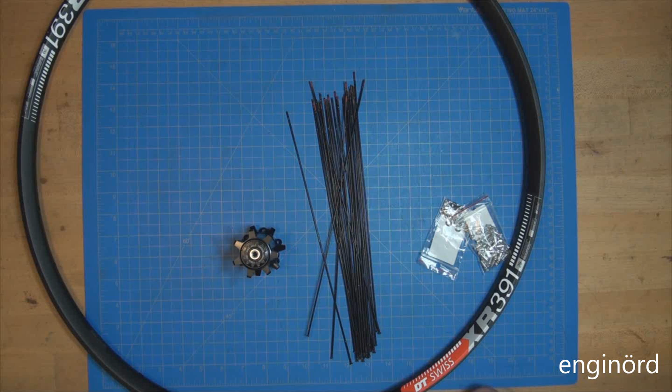As you might guess from the cover picture, we got a new project on hand, and in this episode we're going to be lacing a wheel. This is a special wheel. I have a special place in my heart for Cannondale Lefty, and this is the Lefty hub.

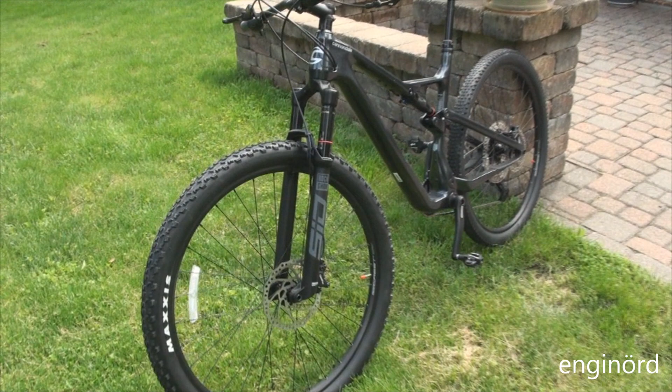I was trying to get the new Cannondale Scalpel bike, and for 6 months of research through Pinkbike and Craigslist, eBay, Marketplace, I couldn't find one that would fit my needs. So I decided to buy a stock bike and then equip it with the Lefty fork. So here's a picture of the stock bike. As you can see, it's got the double crown fork, which is the traditional fork.

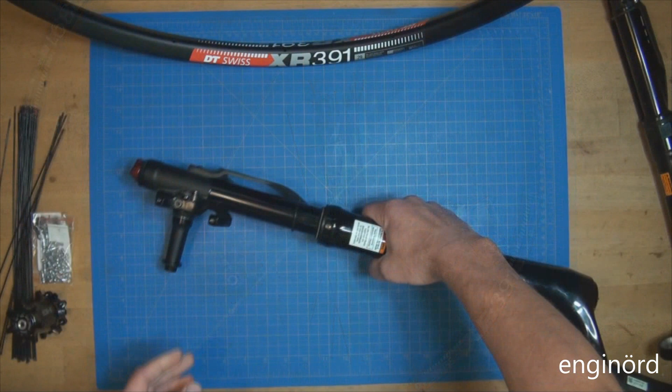I'm a Cannondale connoisseur, and as such, I always liked the Lefty forks. I found this fork together with the hub and the spokes. So this gentleman sold me this as a set. So all I had to do is figure out what kind of rim I want to lace it into. And first I chose a carbon rim, but they are pretty pricey. So long story short, I ended up settling on a DT Swiss XR 391.

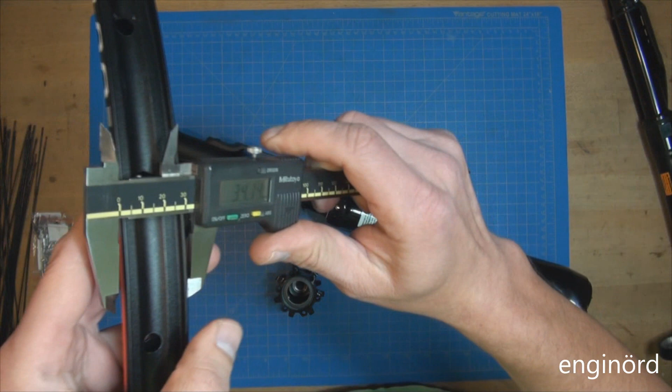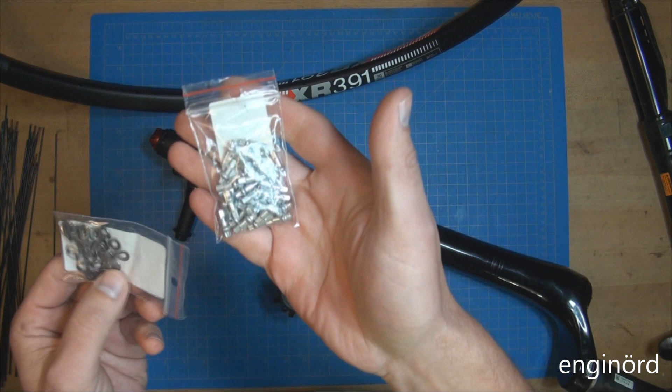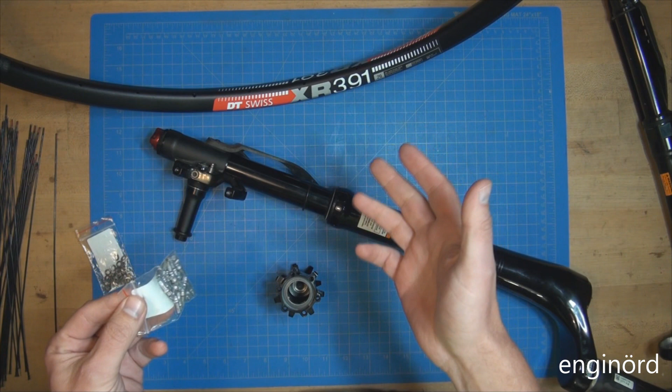This rim measures 29 millimeters on the outside and 25 millimeters on the inside. This is a little wider than what I typically use on a cross-country bike, but this is just a new style that everybody uses. The DT Swiss rim came with the nipples and the steel washers. So these are special washers that you need to include with the spokes. Obviously everything is gonna increase the weight of the rim, but this is just something I'll have to live with for the time being. These are aluminum nipples. The head uses E5 Torx.

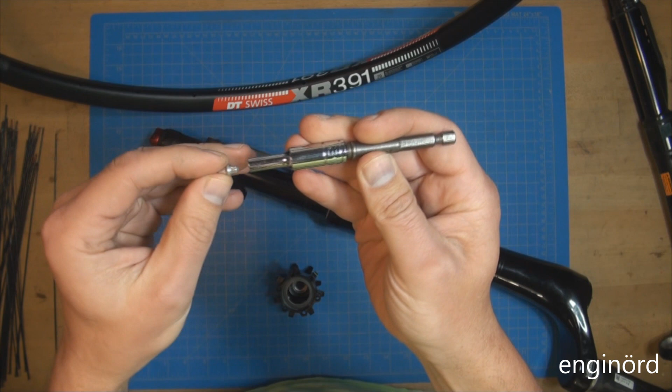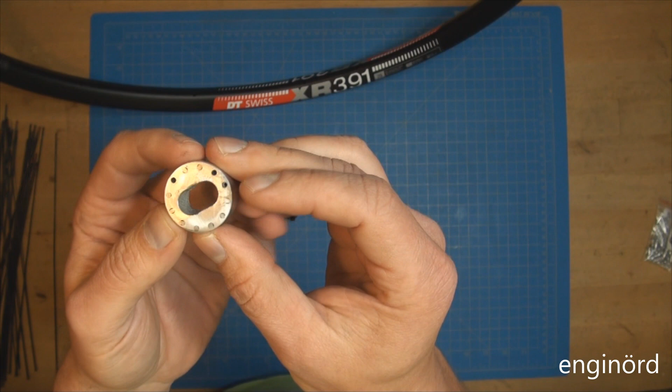The first problem with the Lefty is to remove this cap. So I need to remove this cap in order to mount this in a truing stand. I have a traditional truing stand which has two standoffs, and so you can see that from this side the Lefty is closed shut. A couple of years ago I made this tool. It's a simple tool. I just drilled these holes and I populated these spokes. I just cut pieces of spokes that would engage this nut, and it worked kinda okay. But what happened is when I used it, it had a tendency to hurt these openings and smash them.

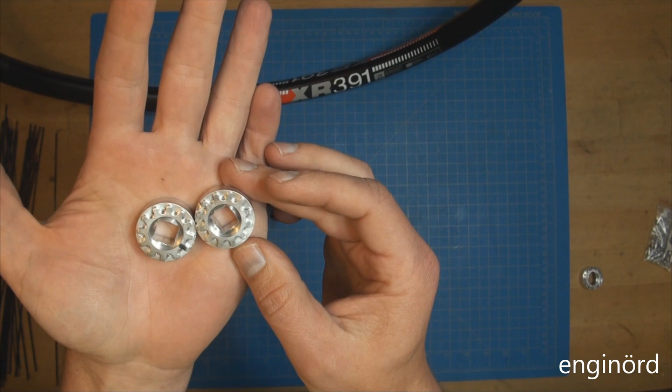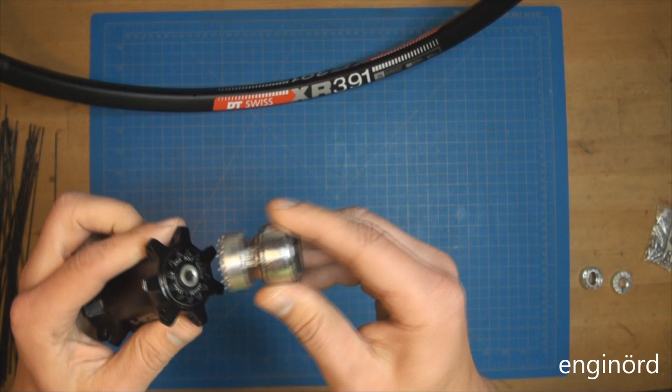Since I have a CNC machine, I designed a new tool, went ahead and cut these two pieces. They're designed to engage with a 3/8 tool like this. They are made of aluminum, so essentially it's the same hardness, and I can use it to conveniently remove the nut. Disclaimer here, the nut has a left-sided thread. Righty-loosey, lefty-tighty. When I created this tool I was so happy.

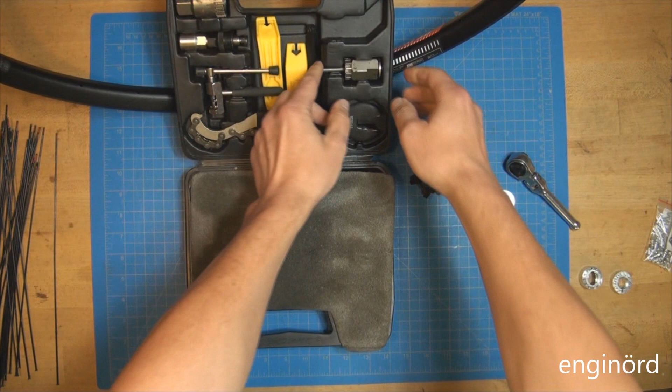I put this on my Instagram, and then someone pitched in, "Oh, why didn't you use the cassette tool?" I had this toolbox for 20 years. This is the tool he was talking about. This tool is used to remove cassettes. If you look, it will be perfectly good to engage the Lefty cap. Okay, so don't make the same mistake I did. Don't make a tool. Don't buy a tool. Just use a normal cassette tool. This is a tool that is designed to remove cassettes.

A little tangent here. If you ever hear a squeaky noise from your front wheel and you don't know what that is, and you suspect that it's a seal or a bearing, it might be this O-ring here. This is the bolt that mounts the Lefty to the fork. And as you can see, it's got an O-ring here, and that O-ring is riding in this cap. So what happens is this O-ring will essentially deteriorate, and when it does so, it will start cracking, and then you will hear this squeaky sound. If this squeaky sound is coming from your Lefty hub, you might want to disassemble it and replace this O-ring.

So now I have a tool. I was able to remove the cap. The next problem is how I'm gonna mount this in the truing stand. So I went ahead and machined an axle. Here's the axle. I had to add a little spacer here, but it goes in, and with that I'll be able to put this into my truing stand.

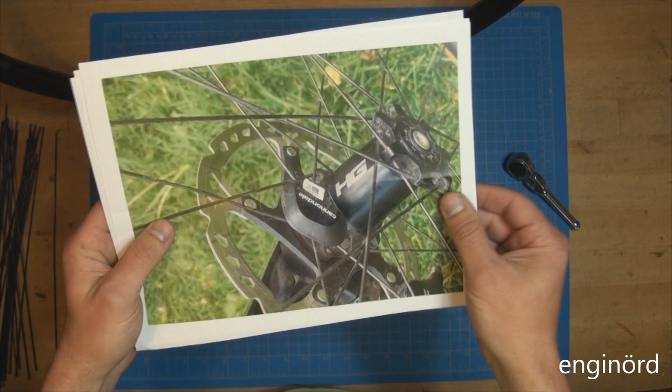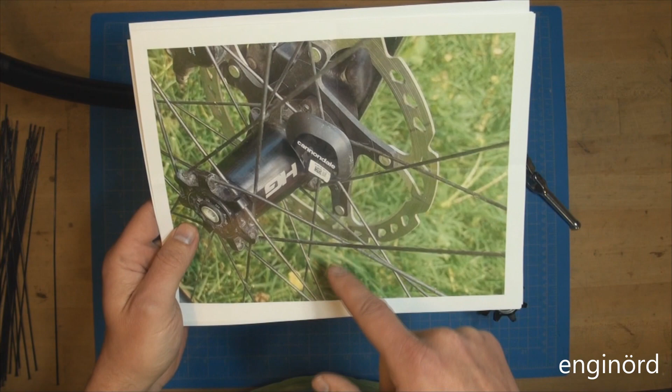Lacing the wheel is not rocket surgery. I'm not going to go into details. You know, if you're lacing any kind of wheel, you can just go online, find some pictures like this, and basically figure out which spoke goes in which direction, and then which spoke is outside, which spoke is on the inside, how many times the spokes are crossing each other. So I went ahead and printed these pictures so I can figure out how it's laced.

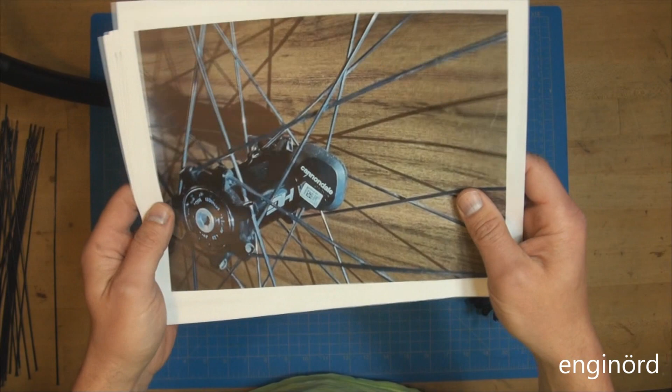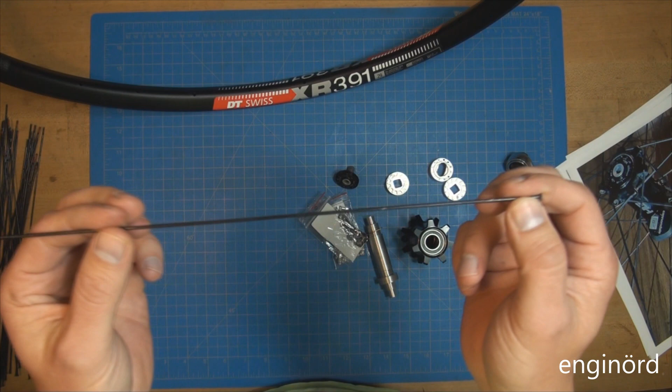This is a 28 spoke pattern, so the rim I had to purchase has to have the same amount of holes. So it's not 32, not 36, it's 28. The next problem was that these spokes are not bladed. Not bladed means that they're completely smooth and cylindrical. These are double butted spokes. The butts refer to the end of the spoke where the spoke is thicker.

Why is it thicker at the ends? Because that's where the stress is, that's where the features are that engage either the nipple or the hub. So if you take a look here, the center of the spoke measures at 1.83, and then the ends measure at 2 mm one end, and it's 2 mm on the other end. That's why these are called double butted spokes.

So the next problem is, when I insert the spoke here, there is nothing really that would hold the spoke from rotating. So I went ahead and I bought a Park Tool CSH1, which is designed to hold these spokes while you're applying the torque to the end. So you can see when I squeeze the tool, it is gonna hold the spoke so the spoke will not rotate.

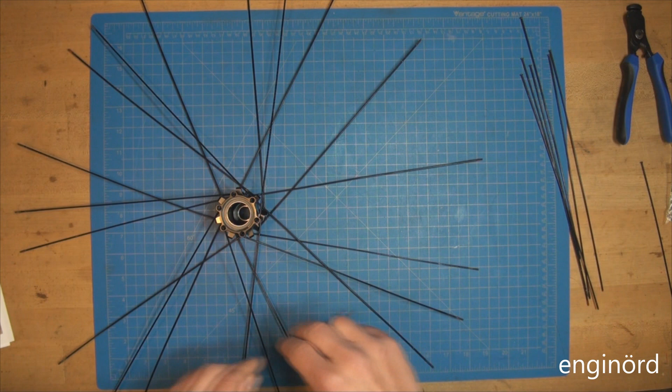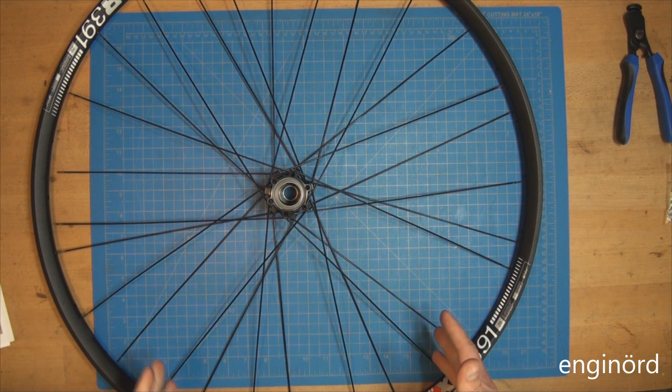So that's done. These straight-pull style spokes are really hard to screw up. There's only one way that the spokes want to go. Next thing is lay the wheel down and basically just attach the nipples with the washers. Now I'm just gonna do a dry fit first, and then once everything lines up, I'm gonna take the nipples off and I'm gonna add thread locker to the end of every spoke.

If you look at the spokes, you can see the red patch here. That is thread locker, and that is added to prevent the spokes and the nipples from loosening. I'm gonna use blue thread locker instead of red. This is after I lightly tighten the nipples on the spokes. What I essentially did is I drove the nipples in until the end of the thread.

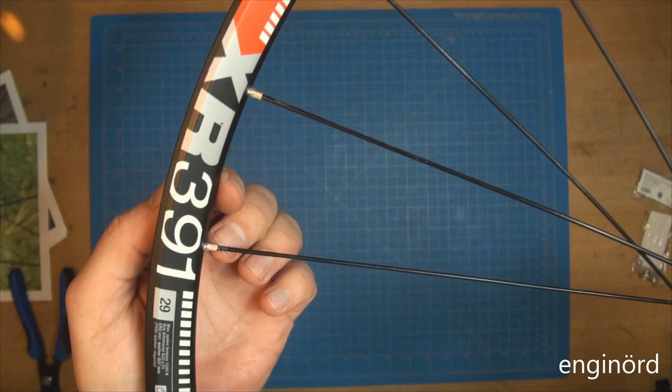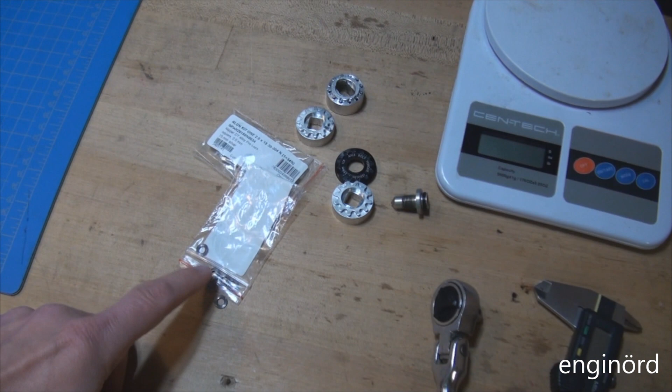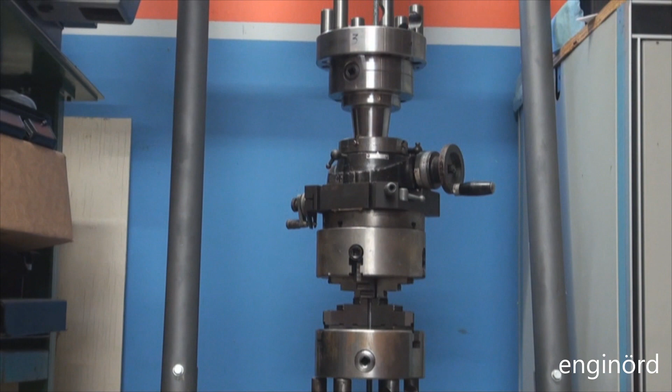So the next thing is double check, triple check everything, and then I can take every spoke out, put some thread locker on it, and go for the final tightening. You'll end up with a lot of extra parts, don't worry. These kits are designed for 32 spoke wheels, and they still include a couple. Just save these because you're gonna need them if you're gonna use the wheel for a while, because these spokes will break over time. You can certainly accuse me of overdoing it, but you cannot accuse me of half-assing it.

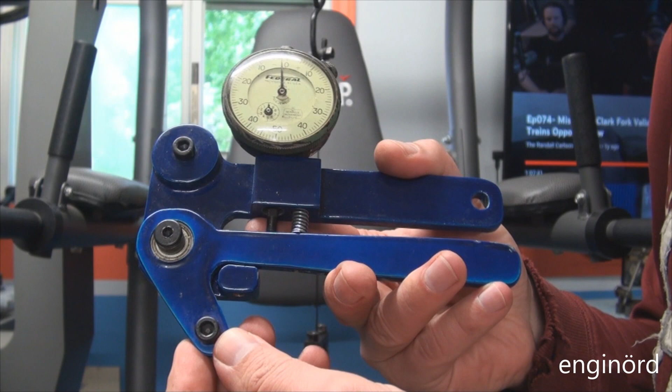What we got here is about 98 kilograms of weight, someone can call it mass, hanging on the very spoke that is built into the wheel. The manufacturer of the spoke recommends 120 kilogram force of tension. This device, my friend, is a spoke tension meter. The original is made by DT Swiss, and I knocked it off about 10 years ago. Essentially, I just made a copy for myself.

The way it works is you first have to calibrate the dial to the weight, and what it essentially does, it's a 3-point bending device. So you can see there's 1, 2, and 3 points. So when I put a piece of wire across these pins and I let it go, the spring is going to provide a certain amount of tension, and then the dial is going to register the movement of the steady and the moving arms relative to each other. When you have tension in that said wire, the displacement is going to be less.

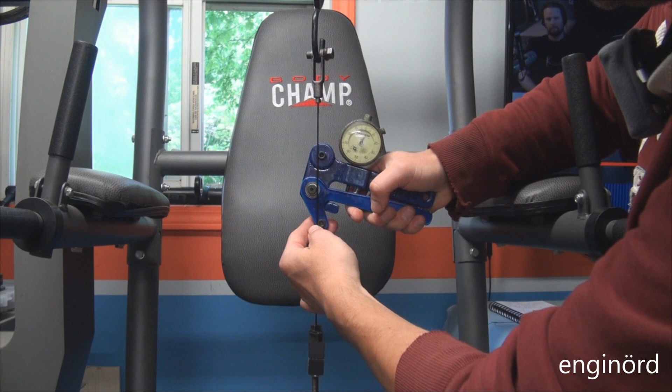So I can put the tension meter across here, and I can see what the dial says, and you can see it's 45. Now, as far as repeatability, it's not the world's greatest instrument. So right now it shows 40. Let's do a third measurement right in the center, and you can see it's 41. You can see it always goes back to 0. That's important.

So now I have 98 kilos hanging on this wire. I can remove the weights one by one and see what kind of measurement the tension meter is going to show. That way I can calibrate this spoke tension meter to a given weight, and I can build a chart.

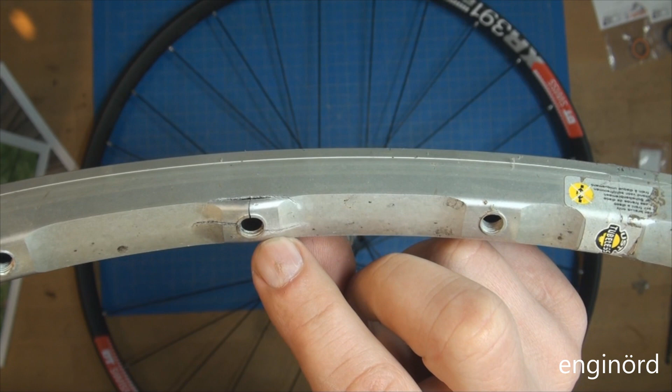Why is spoke tension that important? Let me introduce you Exhibit A. This is a Mavic rim, and as you can see, it didn't fare well. These cracks that you can see here are from fatigue. What happened is, due to the high spoke tension, this gland here on the rim just fatigued out. You can see the fatigue cracks are initiating from the threaded surface.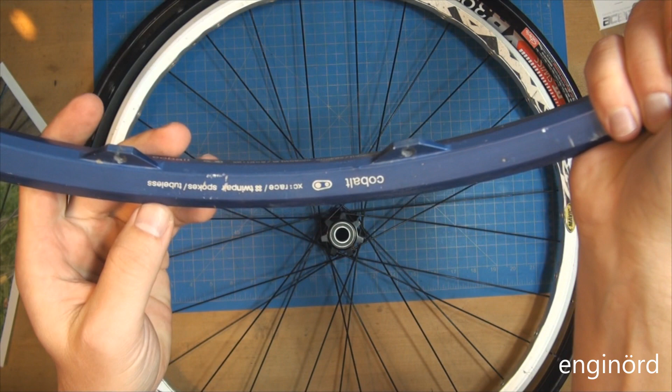This is Exhibit B, which is a No Tubes ZTR Crest 29er rim. Same thing happened. As you can see, the rim here completely fatigued due to the improper spoke tension. This is Exhibit C. This is a Crank Brothers Cobalt twinpar spokes rim. As you can see, it didn't fare well. This area here is fatigued.

Upon closer examination, you can see the beach marks on this surface. The beach marks are a telltale sign of fatigue. Again, what happened here is probably due to the high spoke tension or uneven spoke tension. This one is fatigued out. That's why I'm putting so much emphasis on measuring the spoke tension in the spokes and make sure that they are evenly tensioned.

I did check the spoke tension on my brand new Cannondale Scalpel wheels, which are Stan's Crest 32 spoke. And I also did check on this carbon wheel. This is a Giant SLR1, and the results are interesting.

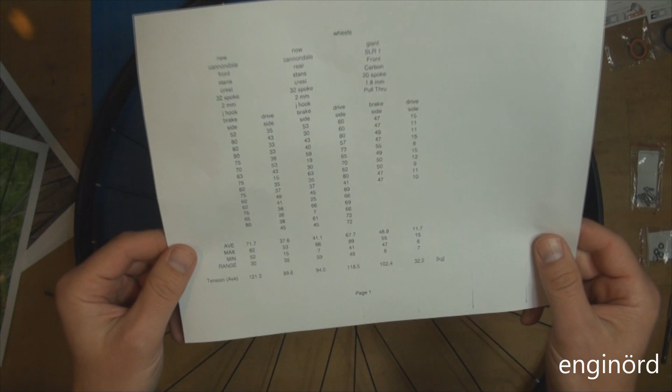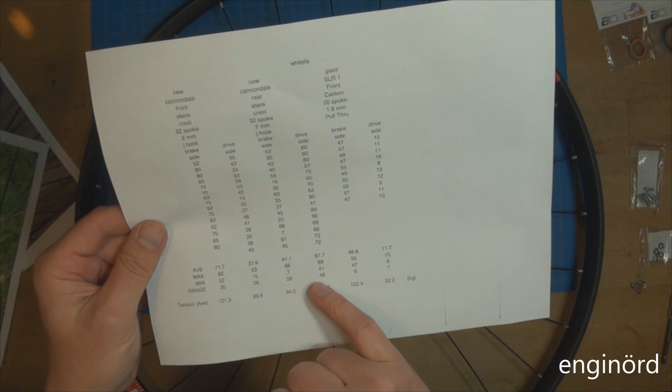The Cannondale wheel, the two sides are not equal, so you got the disc side and then you have the drive side. So one side has an average 71 reading, the other one is 37. Again, 67 and 41. So that results to about 120 kilos of force on one side and about 90 kilos on the other side. So the range is, you can see, pretty large, 30, 38, 59, 48. That is the reading on the spoke tension meter.

However, if I look at the Giant, which has a carbon rim, you can clearly see that this was designed in a wind tunnel and it was put together by intelligent robots. Because if you look at the range, it's 7 and 8. So that means that

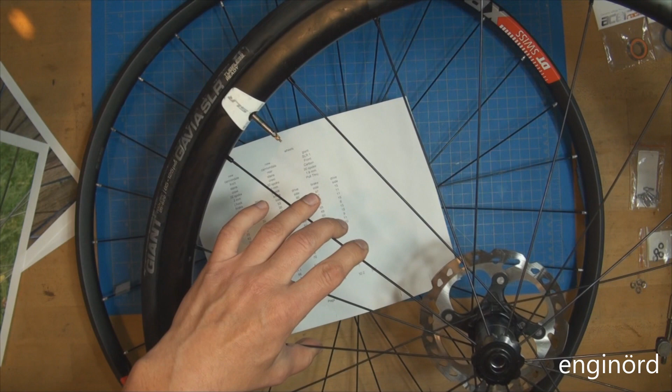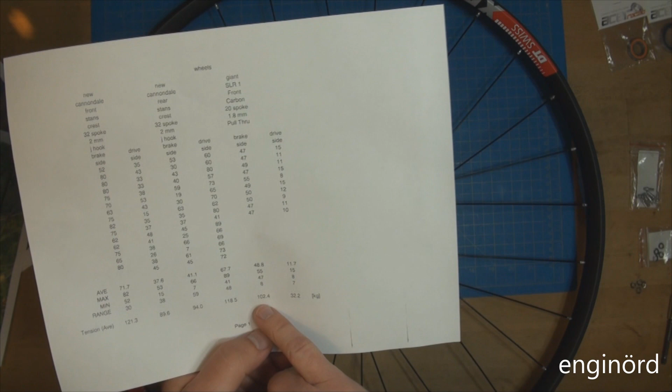this Giant carbon wheel was fine-tuned, so that these spokes on both sides are pretty closely tuned to each other. But again, on the Giant wheel, you can see that one side has about 102 kilograms of force and the other side has 32. So the wheel is not balanced side to side in either case.

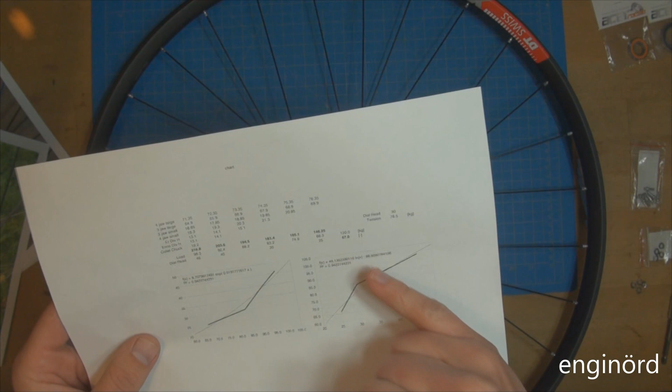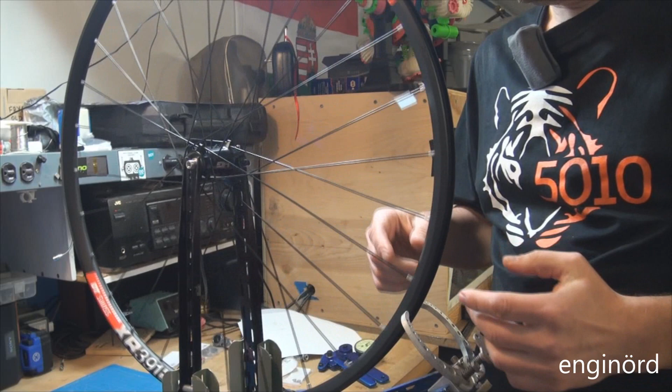These are my charts based on my measurement. So I applied different loads to the spoke and then I figured the dial reading, and from that I can back calculate: if I want to apply 120 kilos of force, my dial reading should be about 67. Again, at this stage the spoke placement is verified, the crossing is verified. So what I'm gonna do is remove each nipple one by one, add thread locker to the spokes, and then go to the tightening sequence.

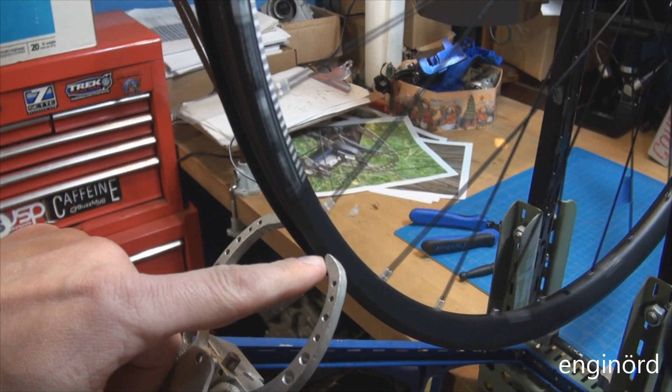So we are at the point when all the spokes have thread locker on them, and they're lightly tightened. You can see the wheel has a little bit of hop. The hop is the radial runout, and the true is the axial runout. It's just the bike jargon. Overall it looks good. So at this point I'm gonna go and tighten each spoke by half a revolution, and then I'm gonna go with my tool and verify the spoke tension in each of the spokes. Right now you can see the spoke tension is basically 0.

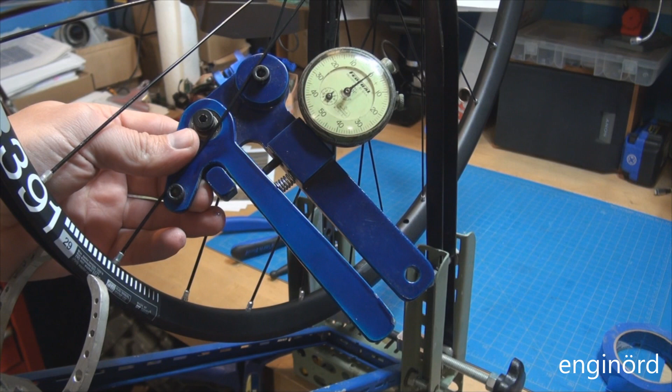After half a turn on each of the spokes, you can see we got some tension. So there's 22, here's 20, here's 20. So you can see it's pretty uniform. So that's where a tool like this becomes really handy, because you can verify your work.

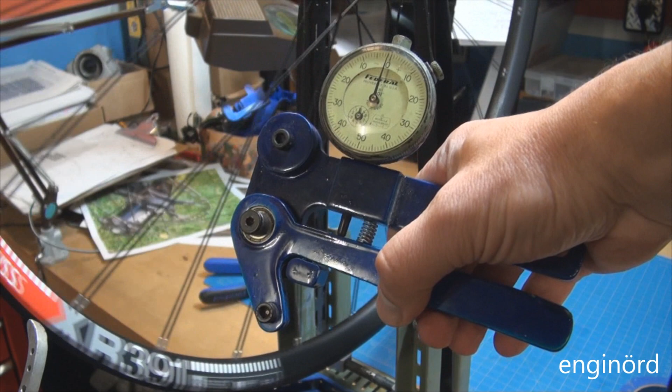When you are tightening these spokes and just doing half a turn at a time, it might seem that some of them go easy. They're not tight enough, and you have a tendency just to go half a turn more. But that might be just because you have some oil on that particular one, and so the coefficient of friction is less, so it seems easy.

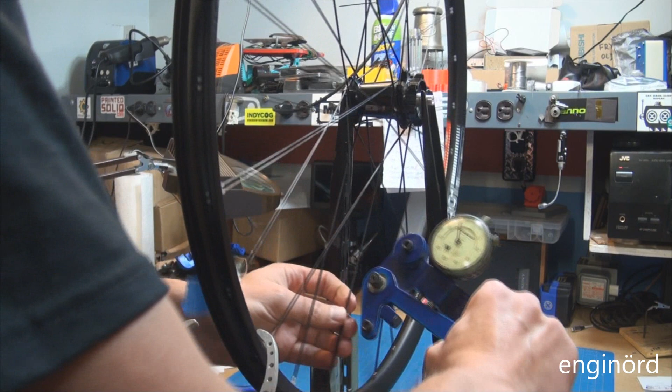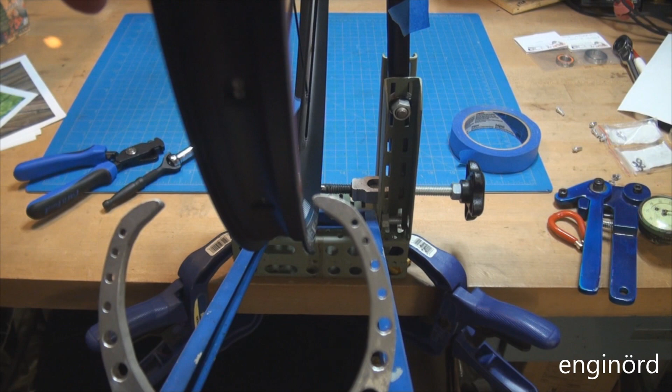These were tightened 1.5 turns now, so that one is at 60, this one is at 50, 46, 60. So you can see it's not even. This is the point when I'm gonna go and look for runout, see how much runout I have, and basically do the hop and true together with tightening the spokes.

So this is the final stage of the truing process, and this is the most critical one. At the end of the day, what I want is all the spokes to be equally tensioned, and I also want the wheel to have the minimum amount of hop and true.

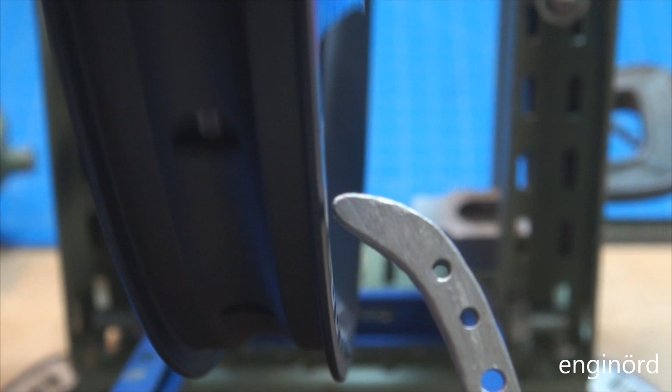I think this is pretty much the point where I need to stop. I'm not sure if the footage will show this, but there's about a millimeter clearance right here between the caliper and the wheel, and you can see the gap as the wheel rotates is pretty consistent. I really don't have good ways of showing that gap, but that is the idea, that that gap is constant.

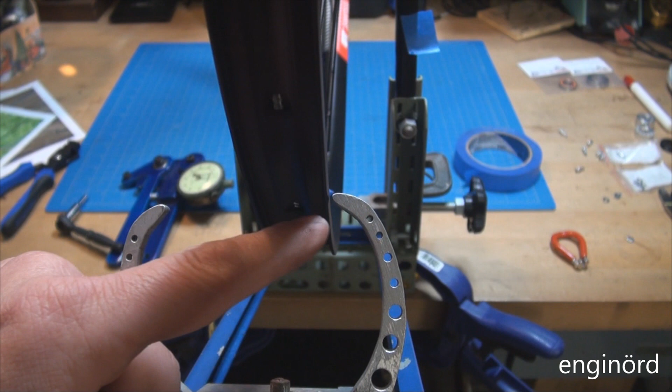I've looked into new wheels, and typically the runout is about 1 millimeter, both the axial runout and the radial runout, or hop and true. As far as the spoke tension goes, it's fairly consistent. So here's 57, 52, 60, 54. So it's plus minus 5.

So again, a reading of 67 would indicate 120 kilogram force. So I'm between 100 and 120 kilos of tension on these spokes. It's essentially the same on the drive side. So this is the brake side, and the far end is the drive side.

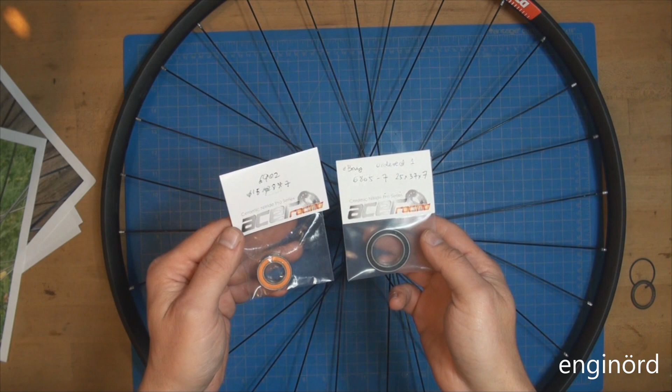Since I'm at it, I'm just gonna go and replace these bearings. These are the standard bearings that came with the wheel, and I got new ceramic bearings. These are not true ceramic, but what they call hybrid. So it's got ceramic rolling elements with stainless steel races.

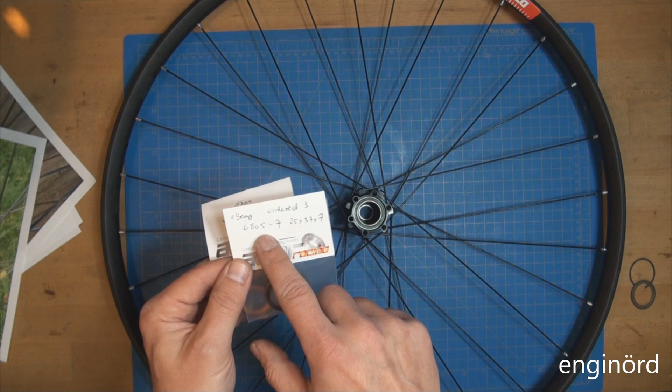We got the brake side, which is 6805. It's 25 ID, 37 OD, and 7 millimeters wide. And then we have the drive side, which is 6902. It's 15 millimeters ID, 28 OD, and 7 millimeters wide.